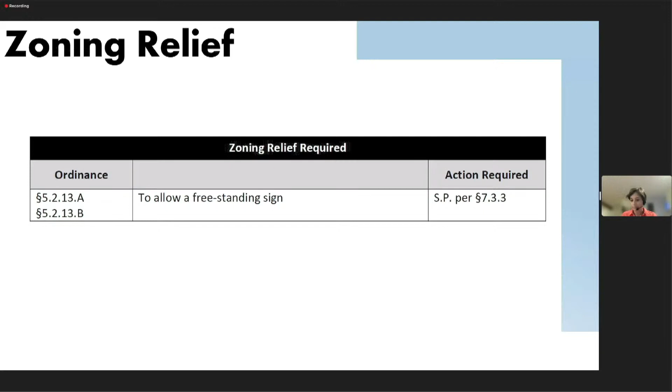When reviewing this request, the council should consider whether the proposed exceptions to the sign ordinance should be permitted and are appropriate due to the nature of the use of the premises, the architecture of the buildings, or their location with reference to the street, such that such exceptions are in the public interest. The specific site should be an appropriate location for the proposed sign that requires waivers from the sign ordinance, which will not adversely affect the neighborhood, will not be a nuisance or a serious hazard to vehicles or pedestrians, and access to the site or streets is appropriate for the types and numbers of vehicles involved.

So this is just showing the location of the site. It is located in a Business 1 zoning district adjacent to MR1 zoning districts at the intersection of Chestnut and Winter Streets in Upper Falls. It is very much a mixed commercial and residential neighborhood, and the property directly abuts multifamily residential buildings.

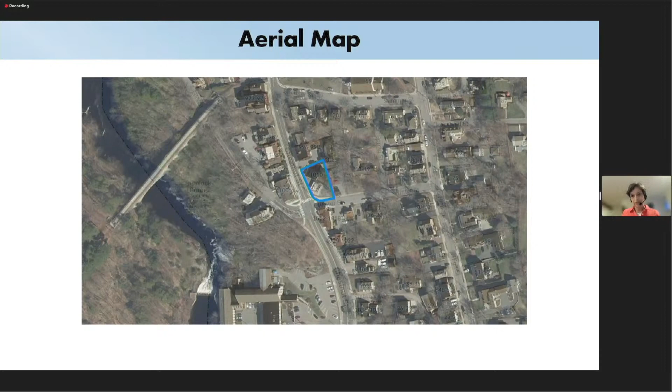This depicts the existing conditions of the site. There is an existing Mobil gas station freestanding sign towards the back of the site and away from the intersection. The site is accessed by two very wide driveways on Chestnut Street and Winter Street, with the sign located adjacent to Chestnut Street. We looked in the files and did not see any permits given for the existing freestanding sign, but we found that the sign is noted on a site plan that dates back to 1990, so the sign has been there for quite some time.

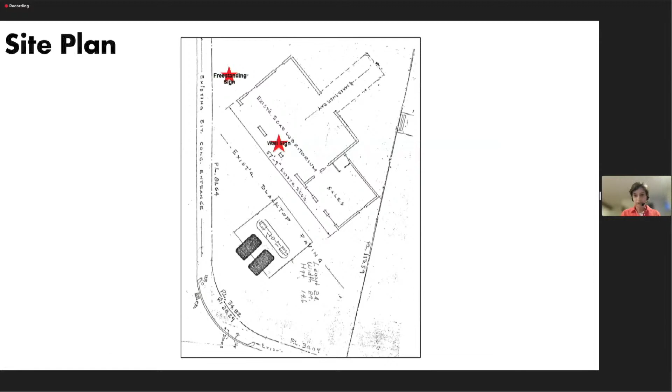This is the site plan showing where the existing freestanding sign would be located, adjacent to the main building area. And some details on the dimensions of the freestanding sign: it is proposed to be a 6 by 4 foot sign, 24 square feet in total area. It is a pylon sign with a digital gas price.

At this point, Planning doesn't have specific concerns regarding the proposed freestanding sign. It is set back from the intersection, is compatible with the commercial use on the site, and there has been a freestanding sign at the same location.

This has had review by various boards, including the Urban Design Commission, who approved the freestanding sign at their December 14th meeting. Engineering review isn't required, and neither is Newton Historical Commission review, although because it is located in a historic district, Upper Falls Historic District Commission review and approval of this project is required. We recommend that be included as a condition of approval for this request, should the city council decide to approve it.

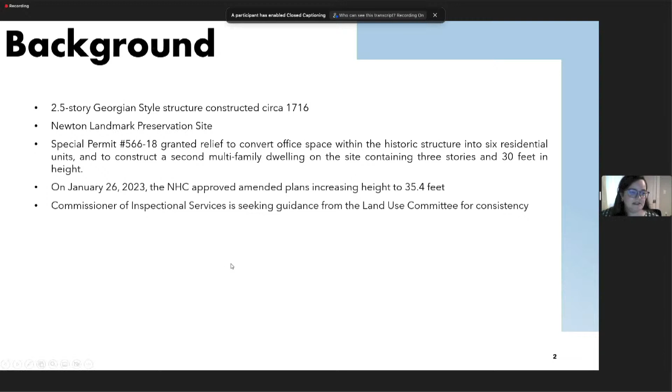So the amended plan increases the ridge height of the roof from 30 feet to 35.4 feet. The petitioner has stated that this increase in height will allow the floor-to-floor height to be 10 feet, whereas the approved height of 30 feet would only allow about 7.5 feet floor-to-floor, which they stated would be difficult to work with. If approved, the proposed new building would be about 3 feet higher than the historic building on the site.

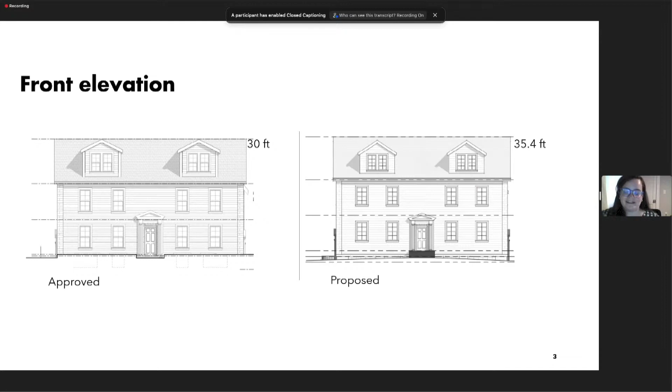Because the site is a bit sloped, parts of the new building would be a bit taller than 3 feet relative to the historic structure. The pitch of the roof has also been slightly altered, which you can see a bit better in the left elevation. But other than the pitch of the roof and the increase in height, the plans are substantially the same. So that's all I have on that.

Okay, and Historic did approve. They actually liked this, truth be told, even better than the original. They did approve it. It wasn't unanimous, but folks at that meeting did express that in some ways this would be preferable and more in keeping with what historically would have been there.

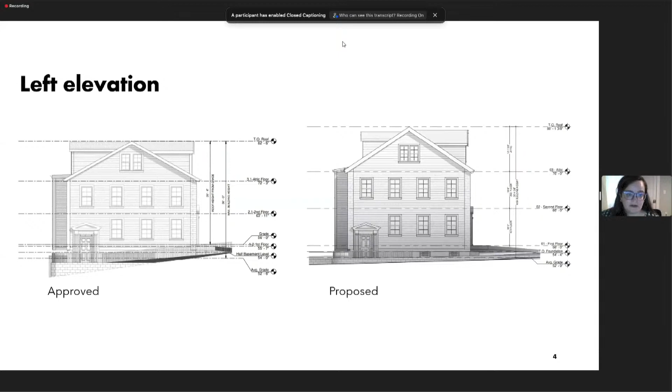All right, and we don't have Mr. Morris here to add anything to it, or anybody from the petitioner, do we? If we do, speak up. Okay, is there anybody from the public that wishes to speak on this? I don't see anybody in the chamber, anybody at home on Zoom.

I will go to the council. Councilor Laredo. Thank you, Mr. Chair. Ms. Kemet, what was the vote of the Historic Commission?

I can take a look. I believe I attached it, but I don't remember off the top of my head. I think there were two folks that disagreed, and I think the rest were in favor, but I can verify that now. And can you remind me how many members are voting on the Historic Commission, is it 5 or 7? I believe it's 7, but I rarely attend, so let me just double check.

Well, that's fine, I'm not going to hold you to that. So was there any—I mean, this is not a de minimis change. This is a 6-foot change, which is pretty significant in my view. Do you have any idea why this change was made, why it wasn't done earlier? Anything at all?

Councilor Laredo, I can jump in. There is a bit of history with this one. I remember handling this request back in 2021, and there was an increase in the pitch of the roof that was not explained to the Historic Commission. At that time, the makeup of the commission was a little different, and they were not supportive of the changes. I can't say if this is the exact same project, but in 2021 they did submit plans showing the new building getting taller. At that time, Historic was not supportive, so they had to change the plans to reduce the height. It looks like they've done some work since and have now submitted plans, and I think due to the change in makeup of the Historic Commission, they now are supportive. It looks like 5 were in the affirmative and 2 voted against it.

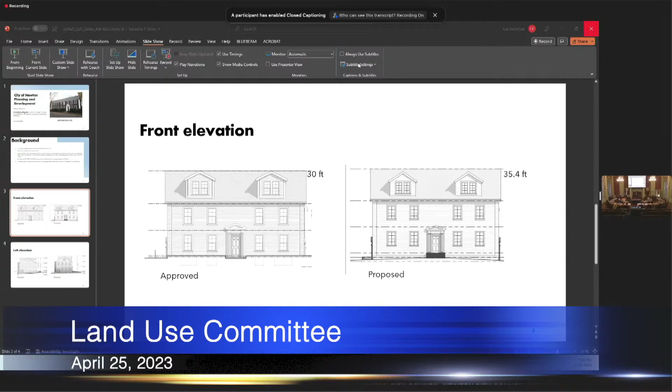My reference in the beginning to the fact that it was favorable, there were some favorable things said about this change was exactly what Councillor Kelly referred to from the committee members at the Historical Commission. And we do take some guidance from them, and 5 to 2 and the consistency with the height in the neighborhood is something that we need to listen to, not necessarily what the commission, the old commission that's no longer gathered, thinks.

Thank you. I will associate my comments with those of Councillor Kelly. The 3 buildings directly across the street are at least 3 full stories high. I'll also note that this is less than a block off of the main street, Washington, in West Newton, and directly behind the police station.

So I think a place that a slightly higher building is perfectly appropriate. It's not like it's towering over a small cape or anything else. I do think that the pitch of the roof matters a great deal. It definitely makes it look much more historic, and I would strongly support this.

Thank you. Councillor Lucas. Thank you. I do have questions, but they probably can't be answered because the petitioner is not here to answer them. So I don't feel comfortable voting for this tonight.

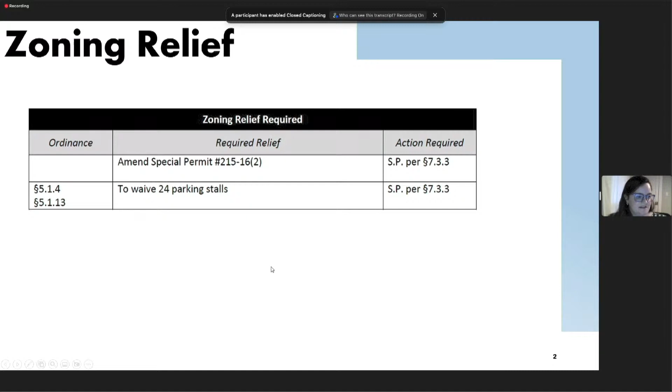In reviewing this request, the council should consider whether the site in BU1 is an appropriate location for the requested parking waivers, if the requested waivers will not adversely affect the neighborhood, if they will not create a nuisance or serious hazard to vehicles or pedestrians, if literal compliance with the required amount of parking is impracticable due to the nature of the use or the location, size, width, depth, shape, or grade of the lot, and if access to the site over streets is appropriate for the types and number of vehicles involved.

The property is located in the BU1 district in Newton Upper Falls. There's a diverse variety of uses in the area, including single and multifamily residences, mixed-use structures, commercial, and open space. The zoning is similarly a mix, including BU1, MR2, MR3, manufacturing, and public use, and it is in close proximity to the 59 bus.

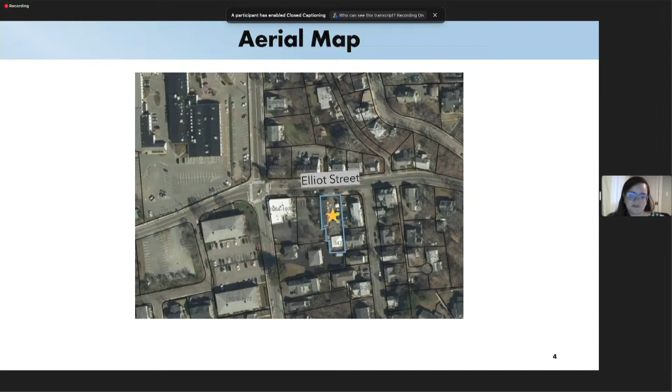The property is 9,676 square feet. It's improved with a 2-story, 69-seat restaurant that is approximately 5,600 square feet. It's Dunn Gaherin's is the name it's been operating under.

There is an existing 6-foot stockade fence at the southern end of the east lot line, which continues along the southern boundary on top of an existing retaining wall. There's a wood panel fence on the eastern property line, a stockade fence on portions of the western lot line by the storage and dumpster area, and a chain link fence on the rest of that lot line. The property is generally level.

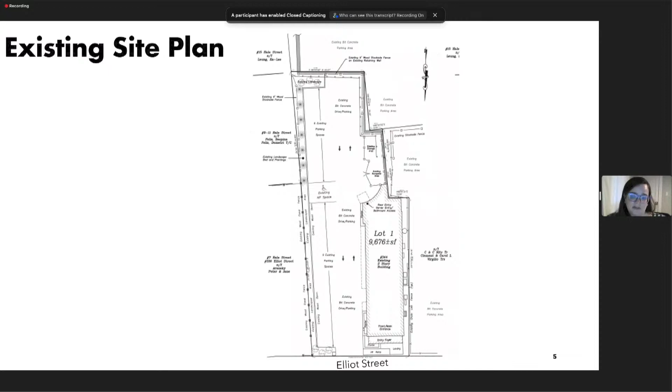It has 16 parking spaces currently, including 1 accessible stall, all accessed via a curb cut on Elliot Street. The stalls are all located along the eastern side of the property, and they are not currently striped.

There are no new structures proposed in this plan. This is the most recent one, submitted Friday, and is not what was in the packet -- it's a bit different. This revised site plan indicates that the patio seating will accommodate 40 patrons, placed close to the eastern wall of the restaurant, separated from that structure by an access and service aisle. In the memo, that area would have been at the far back of the property; it has been moved closer to Elliot Street and closer to the restaurant. Jersey barriers are shown between the driveway and the patio seating to protect patrons from cars entering and leaving.

A total of 10 parking stalls currently on the site will be removed, leaving 6 parking stalls on the site, including 1 accessible stall. The department does want to note that the accessible stall shown in this revised plan is right in front of an existing dumpster. So if there is any chance that at any time there will be obstructions in the stall, including trash cans or debris, that location might not be appropriate in terms of accessibility, because it needs to be clear at all times except for vehicles that are parked there.

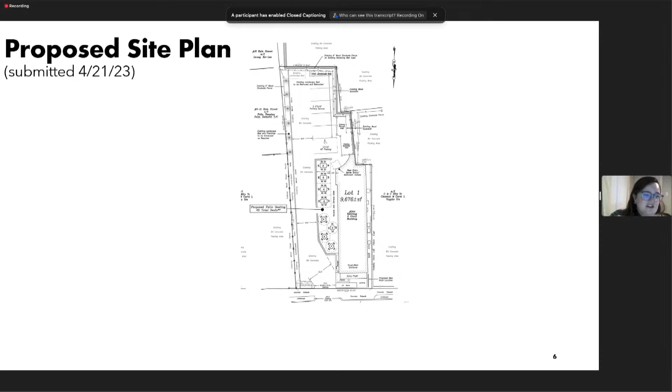Additionally, bike racks are not shown on that site plan, which is required by condition 19 of their special permit. The petitioner also proposes to remove the landscape area at the southeast corner of the site and create a new one at the southwest corner, closer to where the parking will be relocated. No details were provided regarding size or species for those plantings, but the location is just a bit to the side of what's currently there.

In terms of operations, the petitioner provided a narrative explaining accommodations made. Efforts were made to mitigate the impact of outdoor seating on neighbors by moving the seating close to the restaurant and away from neighboring residences. The seating will not be used at all times—it's seasonal, used only when weather allows, and when not used as dining area it reverts back to parking. We recommend the petitioner consider adding striping or pavement markings to delineate a visual path for pedestrians accessing the outdoor seating via the parking lot. The kitchen closes at 9 p.m. No permanent lighting will be installed, only string lights along the perimeter, and the noise ordinance would apply to any music or activities on site.

The Inspectional Services Department issued a zoning enforcement violation to the petitioner earlier this month for failing to comply with elements of their current special permit. We would ask that the petitioner explain their plan to come into compliance and remedy these violations, including violations of conditions 1, 8, and 13 related to landscaping. ISD noted that plantings on site are not sufficient to fulfill what was shown in the approved landscape plan. Condition 14 requires striped parking stalls 9.5 feet in width between each stall, which is not currently the case. Condition 15 requires certain parking signage that has not been maintained. And the bike racks required by condition 19 are not shown on any of the site plans submitted—if they have been created, let us know where they are and add that to the plan.

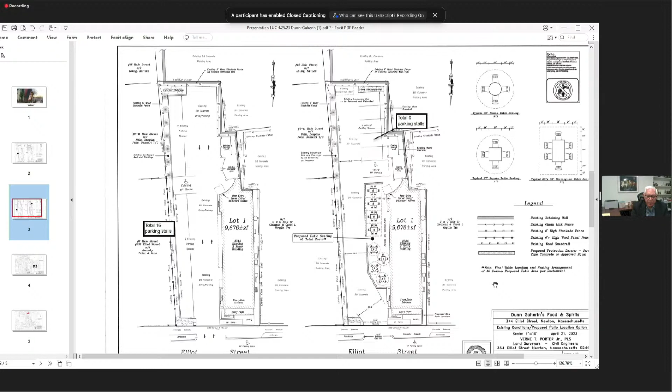We do need a waiver of the parking stall. Shauna doesn't believe she really needs any parking on site because there are a lot of off-site spaces here. We submitted a plan, which Kathy can turn to now, that Vern Porter did. It's 2 sheets, and I know it's too small for anybody to read the spaces, but the long and short of it is that on Hale Street, Chestnut Street, Oak Street, and Elliot Street, Vern has identified 181 off-site spaces.

In addition to that, as I think most of you have probably been there, it's a local restaurant. A lot of people walk there, and there are also some people who will take Uber or Lyft if they go in and have some drinks. I know the planning department noted in its memo that requiring the full required parking on site would really be at odds with the historic fabric of the neighborhood and the city's sustainability goals.

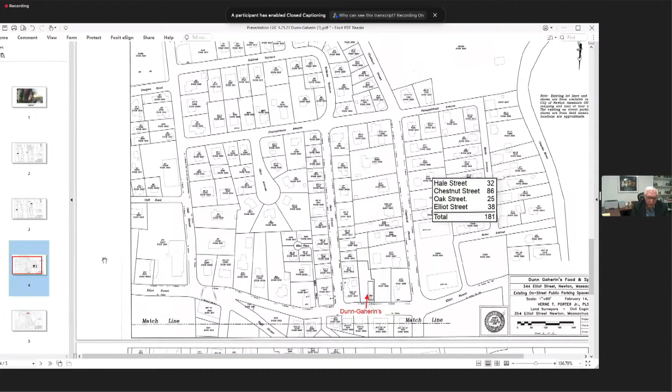The planning department concurs that there are sufficient alternative options to meet the transportation needs without requiring the parking on site. I did want to say that we will stripe the parking spaces, but we wanted to wait until we got through tonight, really till we get through the final council. But if this is approved, we would then stripe in accordance with whatever the ultimate council order says.

Shauna runs a very tight ship, as most of you know. She will close that patio at the appointed hour. And folks will not be ushered out there at 9 or 9:15 to have a meal that can't be consumed in 15 minutes. So I don't think that's going to be an issue. She's got a very experienced managerial staff and wait staff, as I think most of you know.

And she really operated very, very well during COVID with more seats out there. I do want to ask Kathy Winters. Kathy has been working with Andy Mavroulis at ISD on the violations. So I did want Kathy to address those, Mr. Chairman, and that would probably wrap up our presentation.

Great, thank you. That was a question.

Sure. Thanks, Steve. So as for the landscaping, Shauna has replaced some of the landscaping back here, refreshed it to comply with the special permit condition. This landscaping area here, she's going to wait to see if this plan is approved because it's effectively being moved over here, right? So that area will be planted.

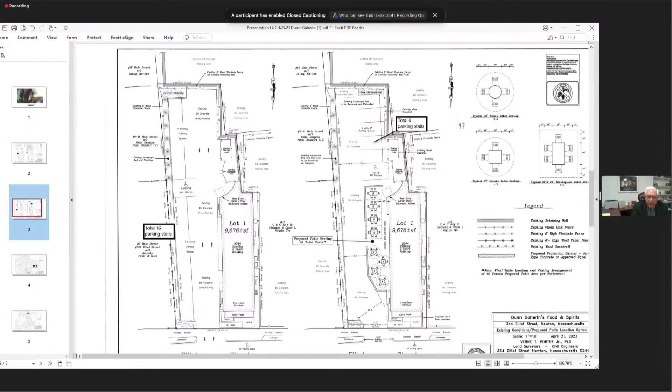First I want to point out one thing, and it's hard to see on here, but we did add a proposed bike rack location to the plan. If you can see it, it's right down here, to the side of the building by Elliot Street. So let me stop my screen share here and just give me a second to pull up those pictures.

And so that's all I have regarding those violations. As Steve said, the 9.5 foot wide stalls will be restriped according to whatever plan is approved.

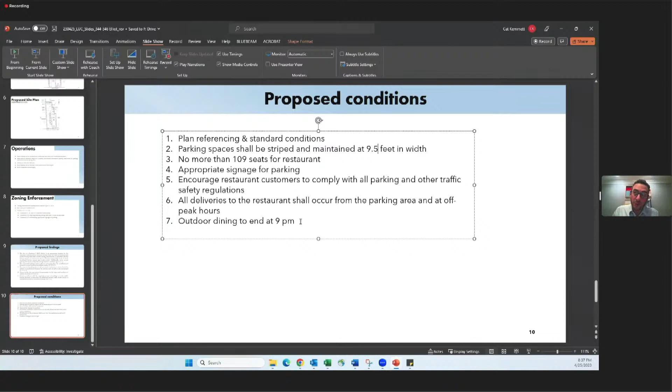It's just, I agree with Counselor Downs. Mr. Temple, if they were to use the parking area and that area for a special event of a kind, wouldn't they have to come and get some kind of temporary permit from the city if it was outside the norm? I'm not sure that they would. That's something I'd have to look into. I don't know if anybody in planning knows the answer to that. There is a tent permit. Yeah, I would think, because it would be an extension of premises. Right now, the liquor would be served within the Jersey barriers. I think if we go beyond that, we need a one-day license from the licensing board to do something like that. So I guess we could draft the order to say no tents unless you have that permit, or license. Let's do it that way. We have found a solution.

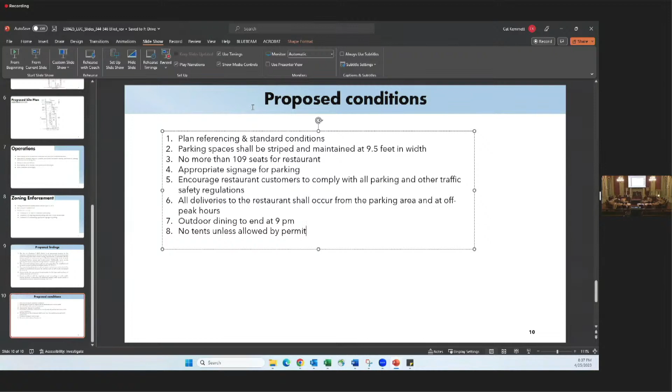Okay. All right, thank you. Anything else here, people? We good? Okay, so Mr. Chair, just to clarify, we're adding a condition regarding the hours of operation of the patio to close at 9 outside, and no tents unless there is permission or permitted by the city. Okay, thank you.

All right, everybody, that is the council order. Clerk will call the roll. Counselor Kelly, aye. Counselor Greenberg, aye. Counselor Lucas, aye. Counselor Markowitz, aye. Counselor Downs, aye. Counselor Bowman, aye. Counselor Laredo, aye. And Counselor Lipoff, aye. That passes 8-0. Thank you very much. Thank you all very much. All right, good luck. Have a good one.

The next item is 122-23. Paul Wong requests to further increase nonconforming FAR to allow an accessory building with a footprint exceeding 700 square feet, and for a dormer within 3 feet of the intersecting wall at 20 Norwood Ave. Mr. Gleba.

Mr. Gleba, you go first. Okay. All right, we go to planning first because we don't want to be redundant, so you can fill in some gaps because planning needs to not leave any stone unturned. So we have flipped this in the past year and it's been working very well, just to let you know. Mr. Walter, thank you.

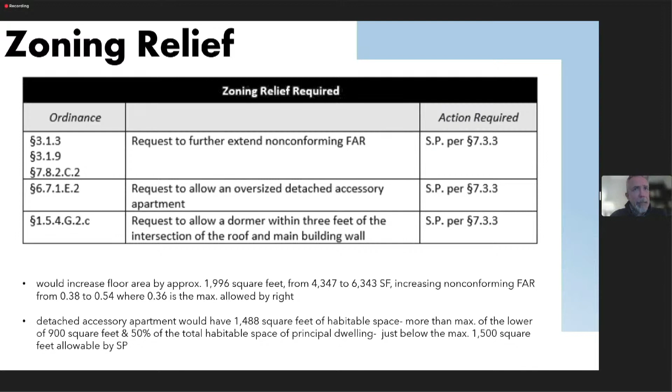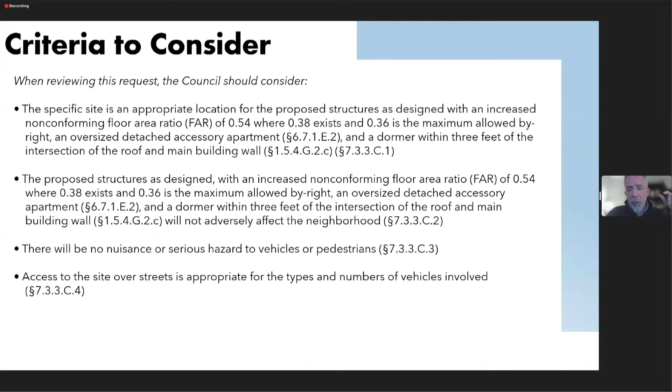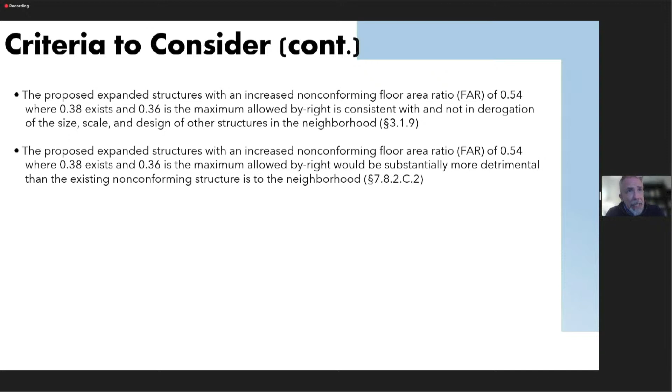The criteria to consider for the council is as shown: whether this site is an appropriate location for the proposed structures. I should note that there's 2 things going on - an accessory structure is being built in the rear, and there's a small addition being built onto the principal structure for a garage, we'll get into that more later. So again, whether this is an appropriate location for that bump up in the FAR, the oversized detached accessory apartment, and that dormer; whether the proposed structures as designed, including those attributes, will or will not adversely affect the neighborhood; whether there would be a nuisance or serious hazard to vehicles or pedestrians, and whether access to the site is appropriate. Those are the special permit criteria. The other criteria - again, the bump up in FAR - whether the expanded structures with that FAR would be consistent with and not in derogation of the size, scale, and design of other structures in the neighborhood. And when it comes to extending the nonconformity, whether that increase in FAR would be substantially more detrimental than the existing nonconforming structures to the neighborhood.

Here we see the site in blue on the east side of Norwood Ave. Sacred Heart Church is kind of to the rear left of the site. Center Street is to the east, and the lake to the west.

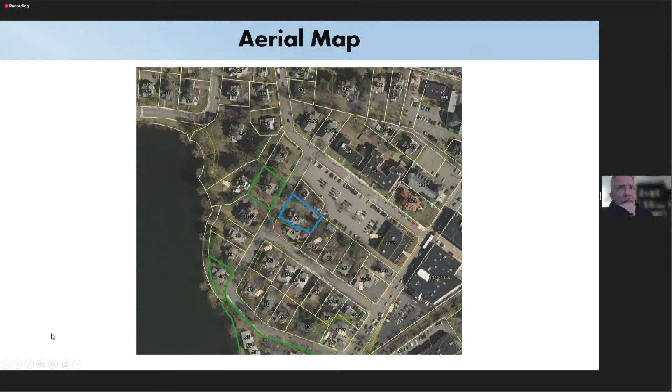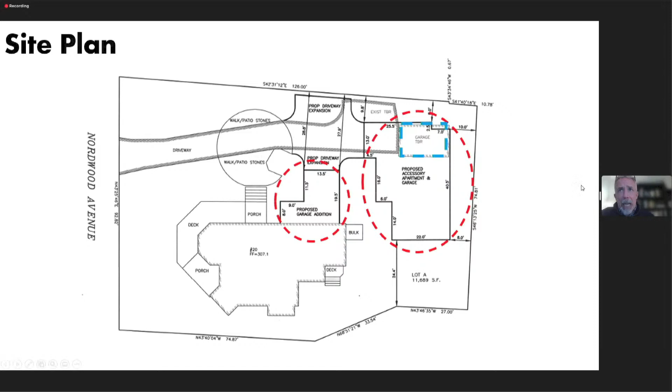It extends a bit beyond it on the upper left here, so we can see how big that is. Outlined in blue is the existing garage, which would be taken down for this project, and the new building would really occupy most of that space plus.

Here's another look at the site plan, perhaps a little simpler. The drawing is turned 180 degrees here, with Norwood now on the right-hand side. We can see the existing home, the attached garage proposed at that location, and the detached accessory structure shown here as well. That structure includes a single car garage and a 1.5 story accessory apartment.

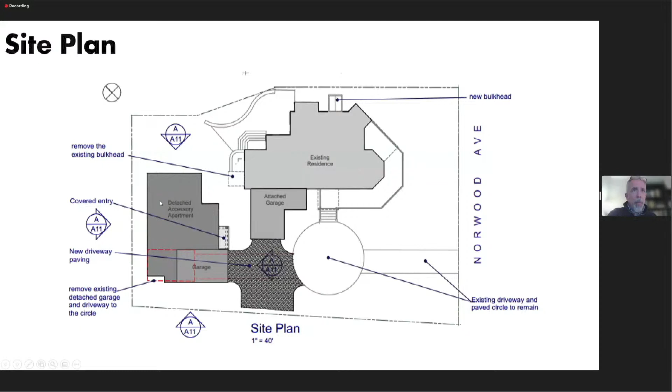Here are the proposed elevations for the addition to the principal house. The larger drawing on the left-hand side is the view from the left side property line, showing the proposed garage, with Norwood on the right of that drawing. The smaller drawing on the right-hand side would be the view of that garage from the Norwood side.

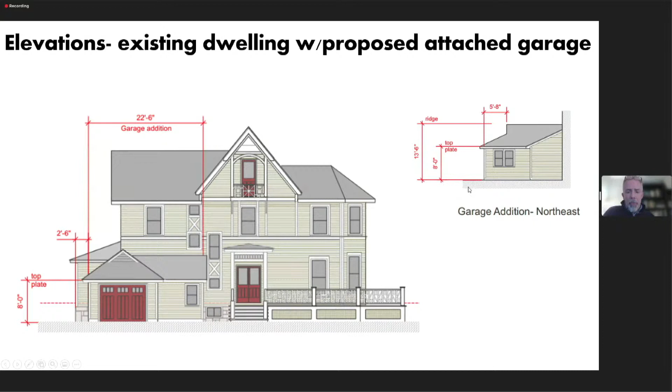For the proposed accessory structure, the west elevation on the lower left-hand side is in effect the front, which would face Norwood. The east elevation would be to the rear. That's where you see the proposed dormer, circled here in green, and you see how it goes all the way to the wall of the floor below, needing relief for that. And the two other elevations on the two other sides.

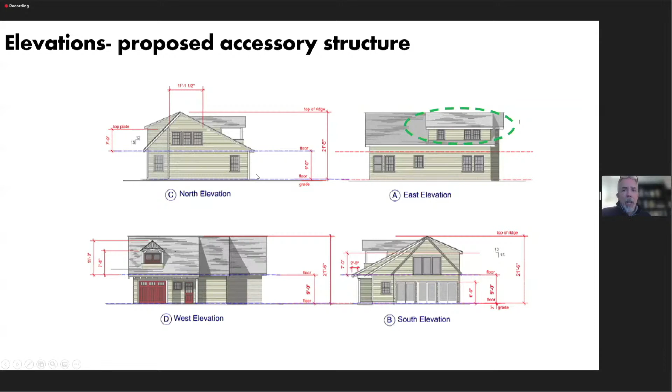That's all we have for now, and hopefully we can answer any questions the committee might have.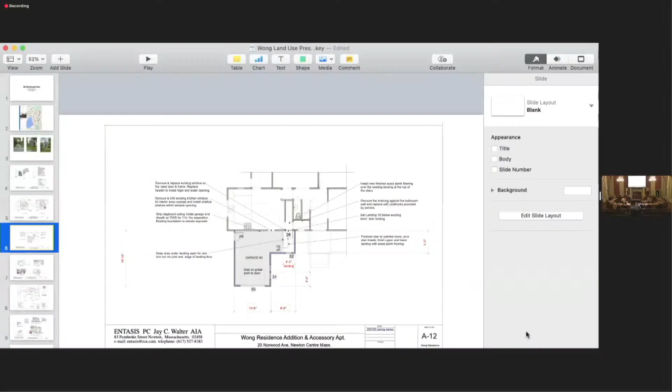I need not go through the plans. I just want to point out the west elevation, the one on the bottom, is what will be facing the street. There's the garage and the entry to the accessory apartment, and a loggia, which mimics the porch on the 3rd floor of the existing house. So most of the mass of the accessory apartment to the right will not be seen because it's behind the existing house.

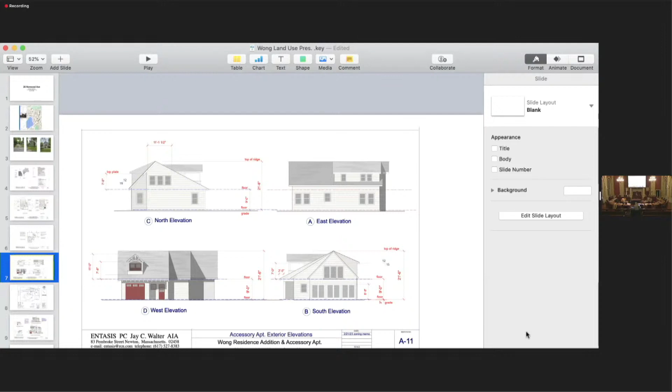And then on the east elevation, you see where the dormer stacks over the edge of the existing house. That's what we're asking relief for. One reason for that is that you'll note on the survey, the property actually juts in, and we had to compensate and adjust the plans to accommodate that and still stay within the setbacks.

This is a 3D model showing how the garage and the entry of the accessory apartment will be seen from the street. The tree in front of the garage is something the clients were keen on saving, and it will remain, obscuring much of the garage. So from the street, I think the impact of the project is really mitigated.

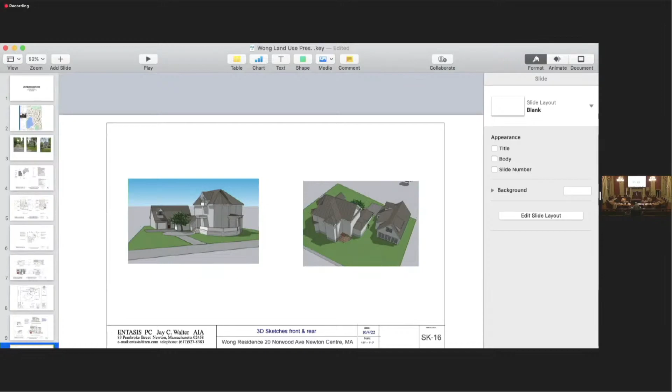Name and address. I'm John Harrington, and my wife is Jan Schifrin. We reside at 45 Crescent Avenue in Newton Center, just around the corner from Paul and Carolyn Wong. Jan and I support the

Wongs' petition to permit construction of an accessory dwelling unit, or ADU, on their property for the following reasons. Firstly, as the committee is aware, Eastern Massachusetts currently suffers from a considerable housing shortage, and real estate in Newton in particular has become quite expensive, particularly when real estate taxes are considered in total ownership costs. An ADU is one means whereby seniors can remain in the communities they call home in the face of these rising prices.

Secondly, to help overcome the area's housing shortage and reduce the environmental impact of transportation, the Commonwealth recently enacted a law requiring towns with certain public transportation facilities to amend their zoning systems to permit increased housing density near such facilities. The Wongs' home is located only a few blocks' walk from the Newton Center station of the MBTA. While the new law is not directly applicable to the Wongs' home, nonetheless permitting them to construct an ADU would further the state's general goal of increasing housing density near public transportation facilities.

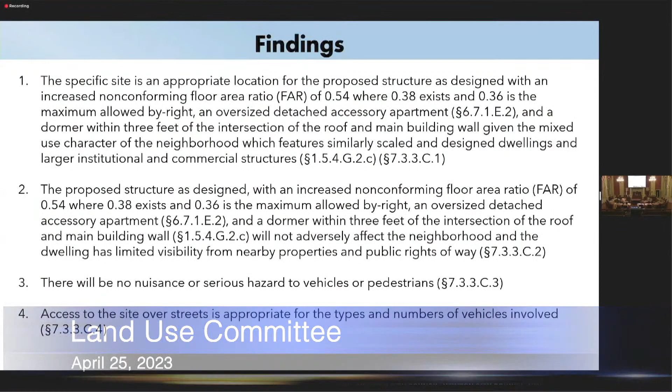Findings include the special permit findings, that it's an appropriate location for this, given the mixed-use character of the neighborhood, which features similarly scaled and designed dwellings and larger institutional and commercial structures. That as designed, it will not adversely affect the neighborhood, as the dwelling has limited visibility from nearby properties and public rights of way. No nuisance or serious hazards, and access to the site is appropriate.

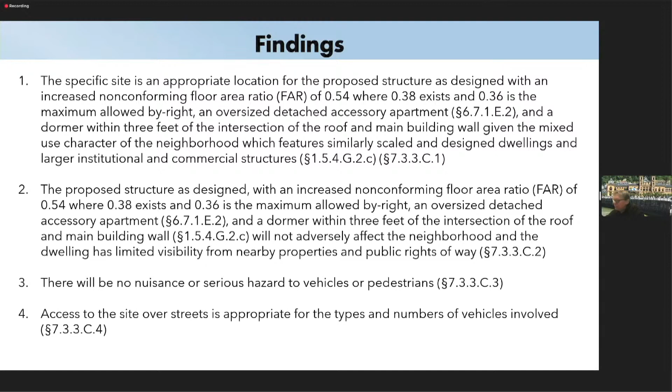The other criteria, that the structure as designed with the FAR of 0.54 is consistent with and not in derogation of others in the neighborhood, again given the mixed-use character featuring similarly scaled and designed dwellings and larger institutional and commercial structures. And then for the extension of the non-conforming FAR, it will not be substantially more detrimental, for similar reasons having to do with the neighborhood and nearby structures, and the dwelling will have limited visibility from nearby properties and public rights of way.

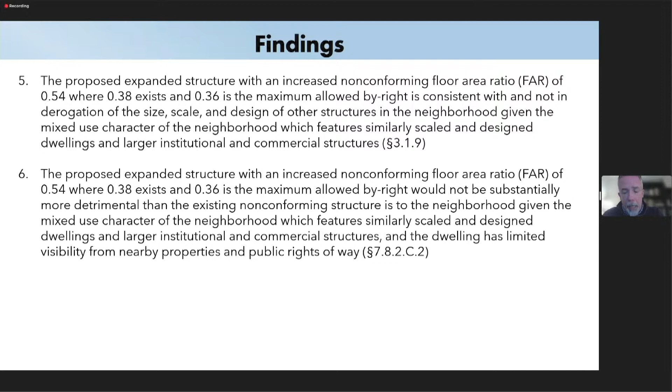And the conditions as shown, including the pest control and O&M conditions. Excellent, thank you. Everybody good? All right, please call the roll.

Councillor Kelley, aye. Councillor Greenberg, aye. Councillor Lucas, aye. Councillor Markiewicz, aye. Councillor Downs, aye. Councillor Bowman, aye. Councillor Laredo, aye. And Councillor Lipof, aye. That passes 8-0. Great, thank you.

Good luck with your project. Okay, last item of the night, 111-23, Adeline Elmias. Request to allow 4 single-family attached dwellings in 2 buildings, to waive certain dimensional requirements and 1 parking stall at 77 Hartford Street. Can we hear from planning first, please?

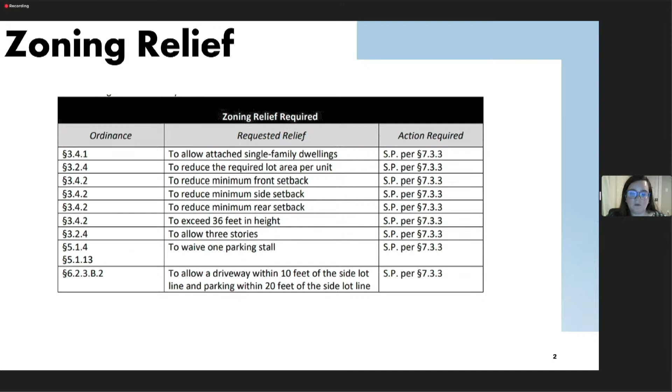If the proposed project as designed will not adversely affect the neighborhood, if there will not be a nuisance or serious hazard to vehicles or pedestrians, and if access to the site over streets is appropriate for the types and number of vehicles involved.

The property is located in the MR1 district at the intersection of Boylston and Hartford Street in Newton Highlands. The property abuts multifamily residences to either side on Hartford Street, a multifamily residence and single-family dwelling to the north, and an auto repair shop across Boylston Street.

The neighborhood has a mix of single and multifamily residences, and the area south of Boylston Street has a mix of commercial uses as well. The zoning in this area is primarily residential, including SR and MR districts to the north, and a more diverse mix of business, mixed use, and open space to the south.

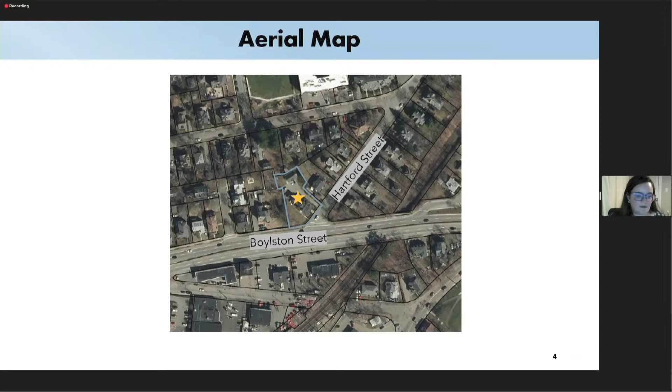The site is accessed by a single curb cut on Hartford Street with a surface concrete parking area behind that principal building. There are 5 parking stalls to the side of the carriage house and 2 stalls in front of the carriage house at the rear, for a total of 7 parking stalls.

The main building has a non-conforming front setback of 22.7 feet and non-conforming side setbacks of 15 feet and 21 feet, where 25 is required.

The carriage house has a non-conforming rear setback of 3 feet where 25 feet is required. In the course of converting to single-family attached dwellings, because the setbacks that apply to detached accessory apartments are not the same as those that apply to the single-family attached, the side setback that is now conforming at 11.7 feet now requires relief.

So the main dwelling also has a non-conforming height of 36.7 feet, where 36 feet is the max allowed by right, and it's 3 stories tall, where up to 2.5 stories are allowed by right. So both of those need relief.

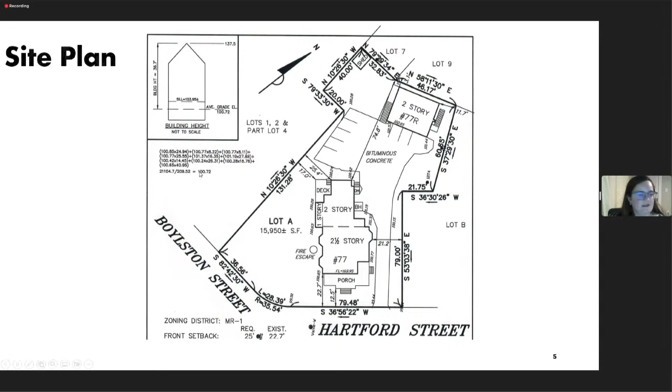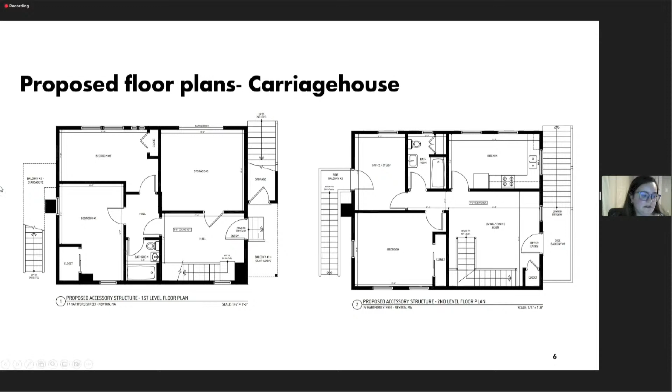Overall, the department is not concerned with the project as proposed. The site is in MR1, so some modest increase in housing seems appropriate to the department. At under 700 square feet, the new unit will be small and add a modest amount of housing without any associated new construction, because the changes will be limited to the envelope of the existing building. And that's all I have for now.

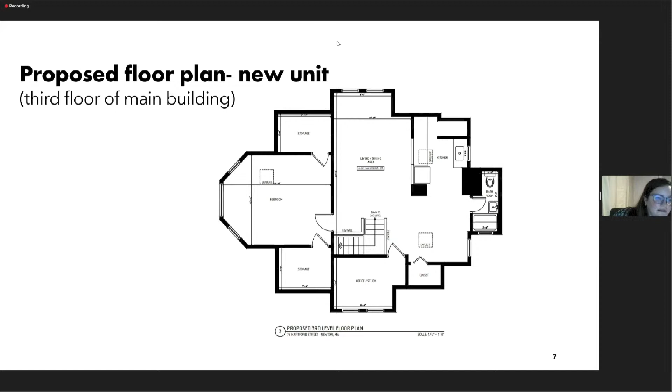Excellent, nice presentation, Ms. Kemet. Do we have somebody here for the petitioner?

Good evening. You've got to talk into the microphone. Hi, good evening. My name is Eldian Elmias. I'm here to speak on behalf of my mom, Adeline Elmias.

We've lived in Newton for over 30 years. We love Newton Highlands specifically. I know everybody has their specific neighborhood. My mom was a first-time homeowner when she came to this particular property, and she's been operating it as a 3-family up until 1993, when the accessory apartment in the back became an addition to what she was renting. She learned about a year and a half ago that the property was never zoned for all of those rental units, and this is what she's attempting to rectify right now.

We're actually not building anything, not tearing down anything. We might paint something, but no major change is going to be done. We're very close to our neighbors, and one of our neighbors came to us when she saw the sign and said, 'Oh my gosh, are you turning this into condos?' We said, 'No, never, that's not the purpose of this.' The concern for our neighbors is that we're attempting to create these individual units so that we can then sell them off and go live in the Bahamas.

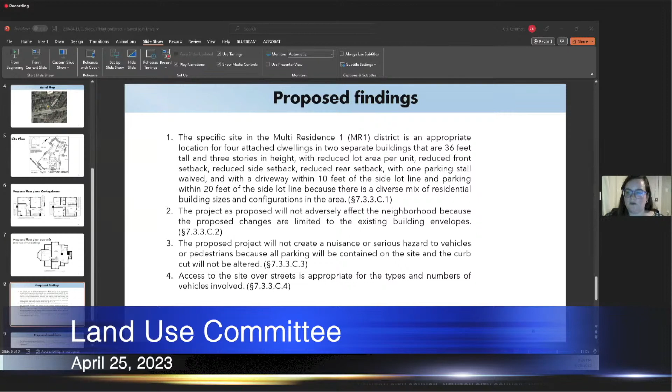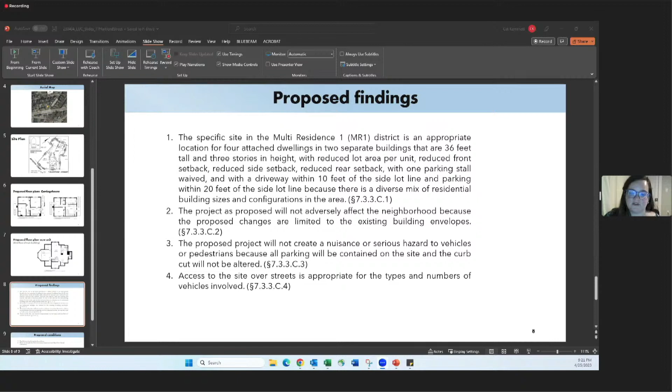Yes. For findings: one, the specific site in MR1 is an appropriate location for 4 attached dwellings in 2 separate buildings that are 36 feet tall and 3 stories in height, with reduced lot area per unit, reduced front setback, reduced side setback, reduced rear setback, with 1 parking stall waived and a driveway within 10 feet of the side lot line, and parking within 20 feet of the side lot line, because there is a diverse mix of residential building sizes and configurations in the area. Two, the project as proposed will not adversely affect the neighborhood because the changes proposed are limited to the existing building envelopes. Three, the proposed project will not create a nuisance or serious hazard to vehicles or pedestrians because all parking will be contained on the site and the curb cut will not be altered. And four, access to the site over streets is appropriate for the types and number of vehicles involved.

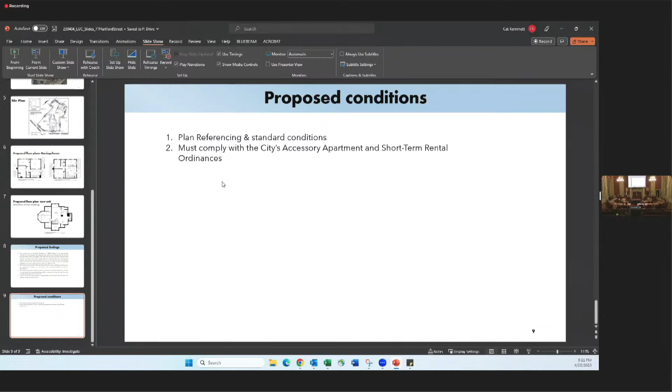We good? All right, we have a motion to approve. Please call the roll. Counselor Kelly, Aye. Counselor Greenberg, Aye. Counselor Lucas, Aye. Counselor Markowitz, Aye. Counselor Downs, Aye. Counselor Bowman, Aye. Counselor Laredo, Aye. And Counselor Lipoff, Aye. That passes 8-0.